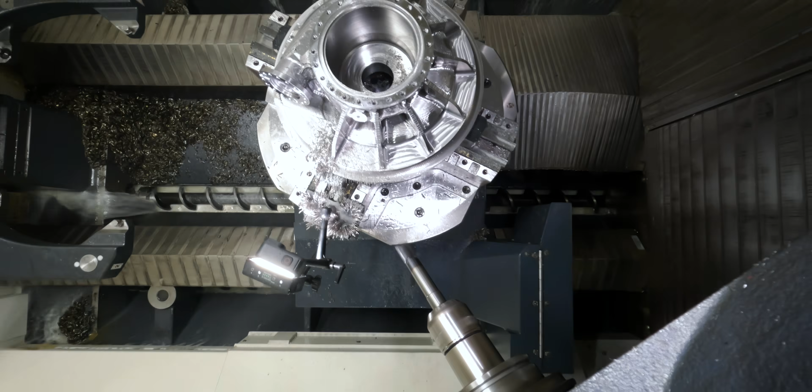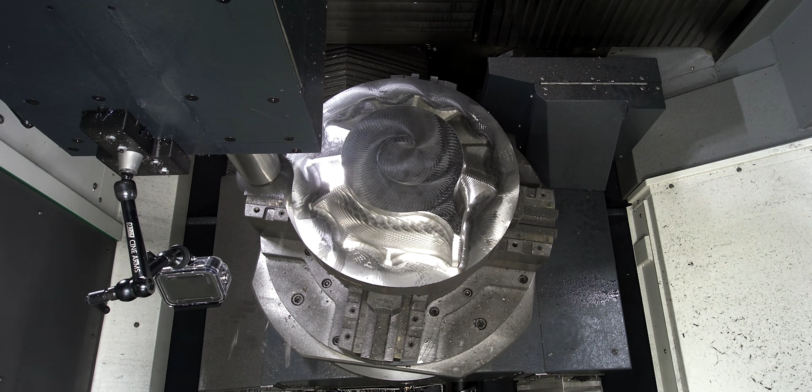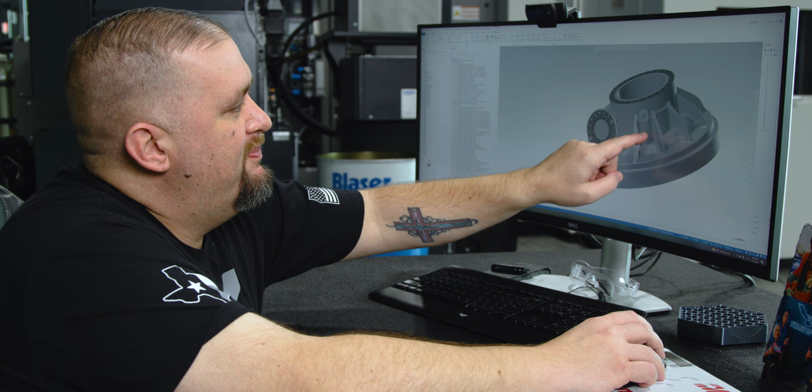Today we're back over here at the CP6000 working on our octo snail part. Now if you caught the first video, we did all of our roughing using 3-axis motion and then some polar interpolation. But today we're going to get into all of our 3+2 stuff. So this is the state that we left the part in at the end of our last video. And you'll see that we still have all these pockets underneath the port that we have. We still have to get underneath our flange. We have to get deep into these pockets here, and that's what we're gonna do today. So I'm gonna show you exactly how we did it.

Now before you guys start telling me how terrible this tool sounds, keep in mind that it's sticking out 8 times diameter, and then it's in a 7-inch long shrink fit holder. Add to that, we're going to be cutting with the center of the ball, and that's just the way this thing is going to sound. There's no way around it.

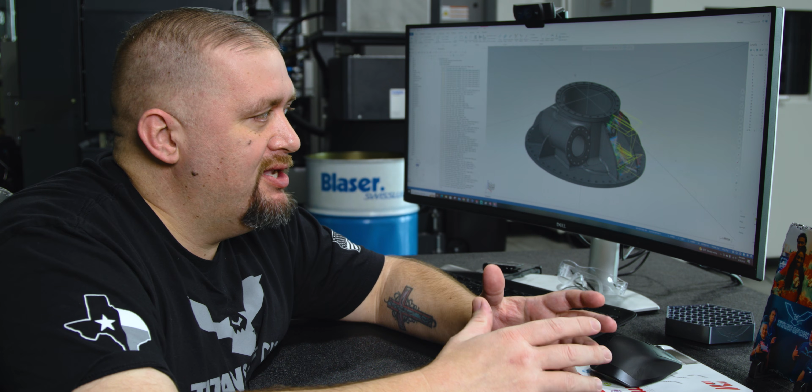Now in the first video, I talked a little bit about why you want to use primarily 3-axis motion on a 5-axis machine. Most 5-axis machines are going to be more rigid in the 3-axis orientations. And so today, as we start our 3+2, just to explain a little bit about what that means, it means we're going to be roughing still in 3-axis mode, but we're going to use our 2 rotary axes for positioning.

Now on Mastercam, 3+2 programming is super simple, but the first thing you're going to need is a plane that orients your spindle direction to your part. So I want to be split perfectly between these two ribs here, and I want my Z-axis to come in perpendicular to the back wall and parallel to the bottom floor.

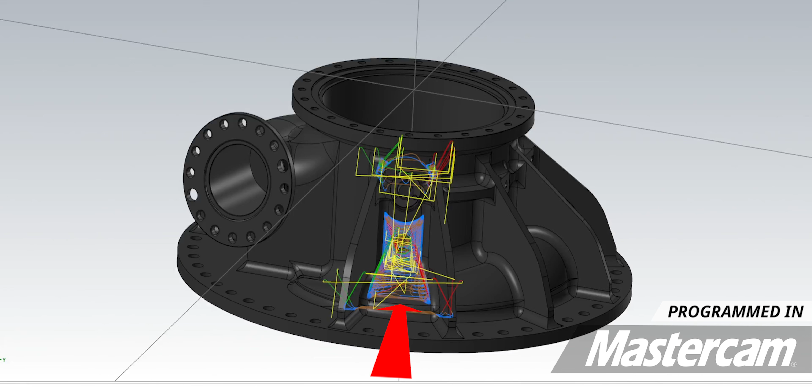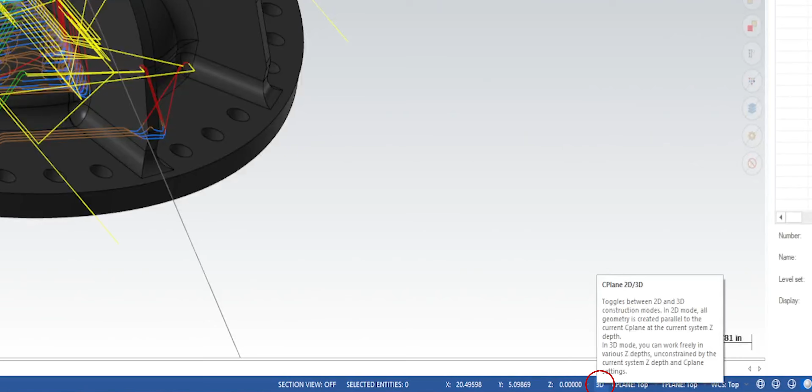So in order to get that location, I'm going to make sure that I'm in 3D sketch mode, and I'm going to draw a line from this point to this point. So now I have a line with a midpoint that I can use to find the center of that pocket. So we're going to switch over now to 2D sketch mode, look at our part from the top, and I'm going to simply draw a line from my origin to the center of that line I just sketched. So now I have a vector that I can use to create my new plane.

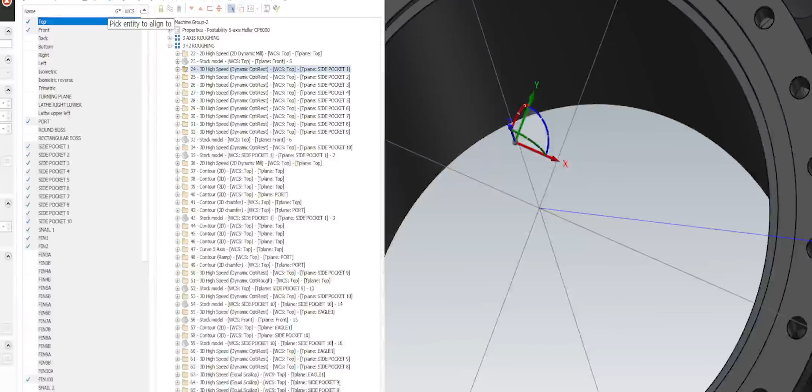To create my new plane, I just go into my planes, select a dynamic plane, snap to my origin, and then I can use these little bars here to align my Z-axis to that new line I just drew. Now I prefer to always have my X going in the direction that X is actually going on the machine, but that's not 100% required.

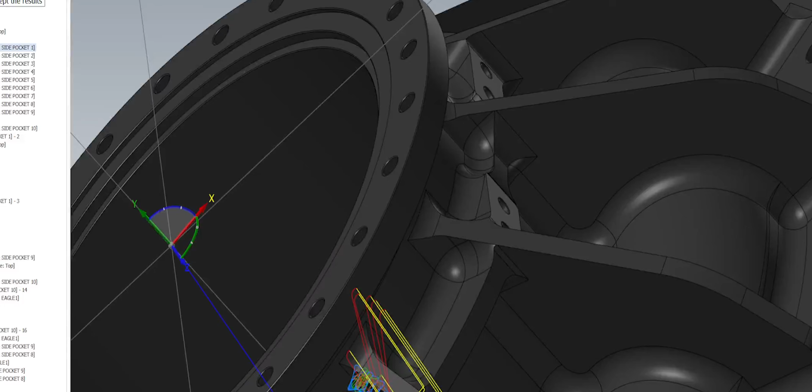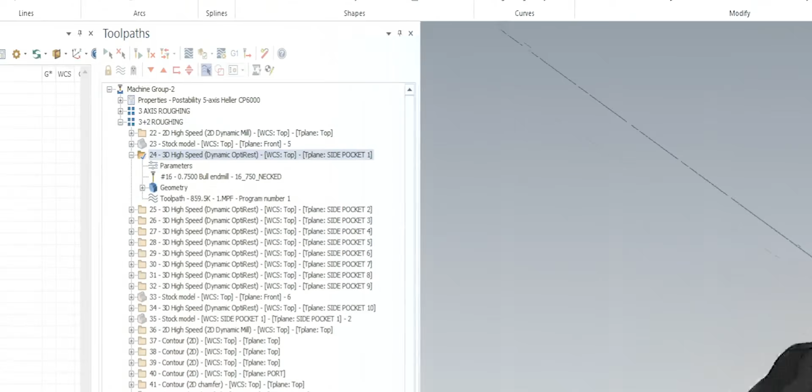So there you see we have our new plane, and now what we would do is create a tool path using our top plane as our WCS, and then for our tool plane we'll use this new plane we just created. So if we open up this tool path here where we're starting to rough out this pocket using OptiRough, you can see what we have in our plane designations here. Top, side pocket 1, side pocket 1. So now the machine knows that we actually have to use both our B axis and our C axis to arrive at a combination that's going to allow us to get into that pocket.

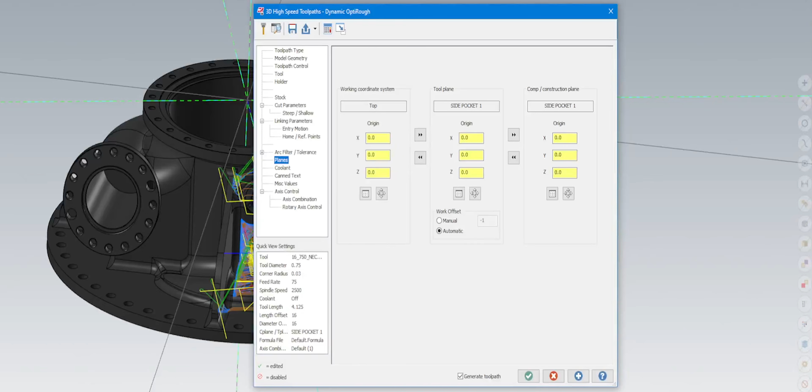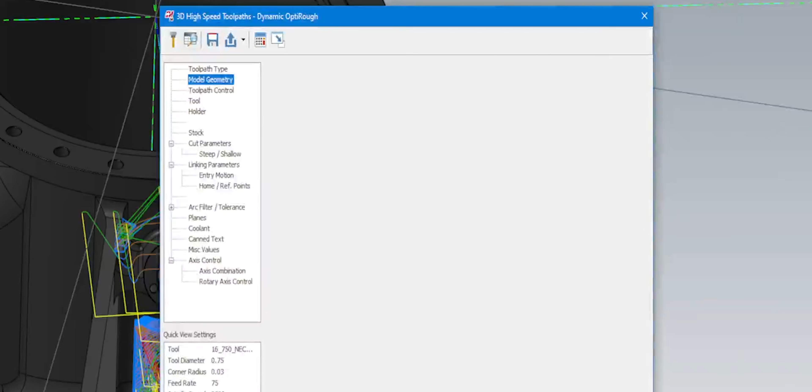Now we can look at the geometry that I use to control this tool path, and for our machining surfaces I just have the entire part and no avoidance surfaces. So how do I control where the tool path is going to actually go? I don't want it coming out here. I just want it to stay inside the one pocket that I'm focusing on. So we do that using our tool path control. Under tool path control we have a boundary chain, and for my boundary chain you can see I just sketched a nice closed loop that's going to tell my software that you have to stay inside here.

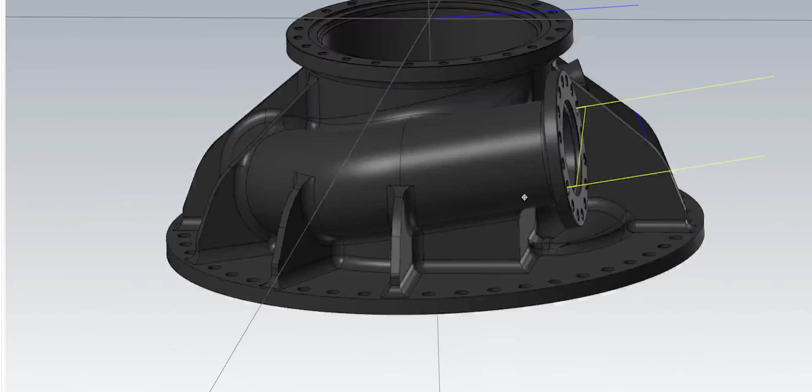So now that we have all of our pockets roughed out, there's some other things that we're going to have to get into here that are really going to be difficult to get to without colliding with our part. So if you take a look underneath our flange here, we have to get all the way down under there, and we have to make sure that we don't damage this front flange of our part. We're also going to have to get down in here, down underneath this flange, and we're still going to have to do some more roughing down in here, and we're going to have to be careful that we don't collide with our bottom floor here.

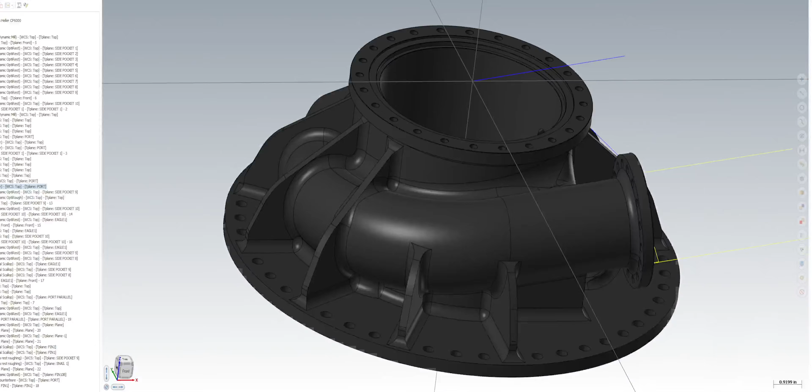So the very next thing I'm going to do is another OptiRest path, just like we did on the original pockets, and we're going to let it remove as much material as it possibly can before we have to start really changing our angles and struggling to get to some of these locations. And you'll notice the first thing that I did was come in perpendicular to this back wall. Now for this next tool path, we came in at this angle and got everything we could underneath.

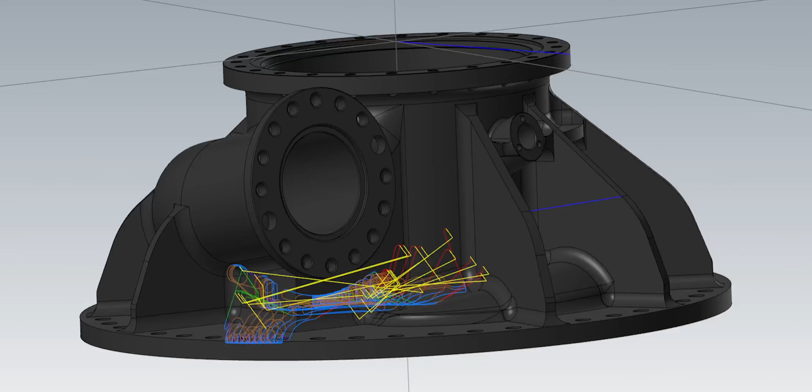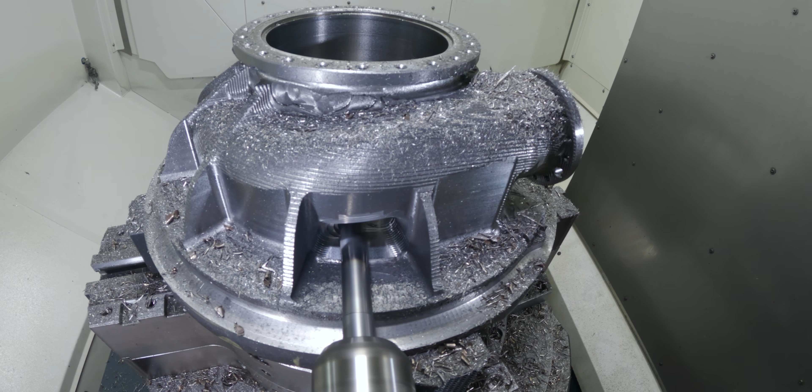All right, so now we have our part in this state here, and we've roughed out all this material using a bull end mill, so there's still quite a bit of material left in some spots here that I don't want to leave for the finishing. So you may see this 1/2 inch, 3 inch long ball end mill that we're using, and it's sticking out a mile. So it's not going to sound that great.

We're going to be cutting on the center of our ball, and you know, the holder's not very big in diameter. It's just not a very rigid tool overall, but we have to have it that way for the reach that we get. Because if you take a look at our part here, we don't just have to worry about colliding with our part. As our head tilts from vertical to horizontal, now we have to be concerned about our chuck hitting the front of our spindle face.

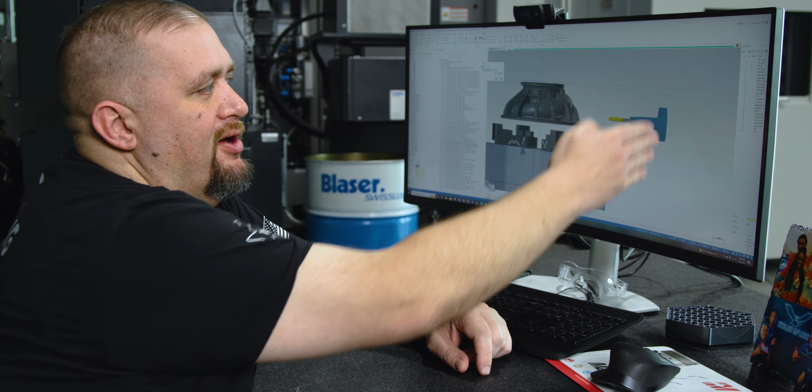So if you take a look here, I know that the back of my tool is where my spindle is. So I don't ever want to see this go past my chuck, because there can be trouble then, and we don't want another crash video. Oh. So you can see there, we're good, no collision, everything's gonna be fine. But we also have to make sure that we're not gouging our bottom floor right now.

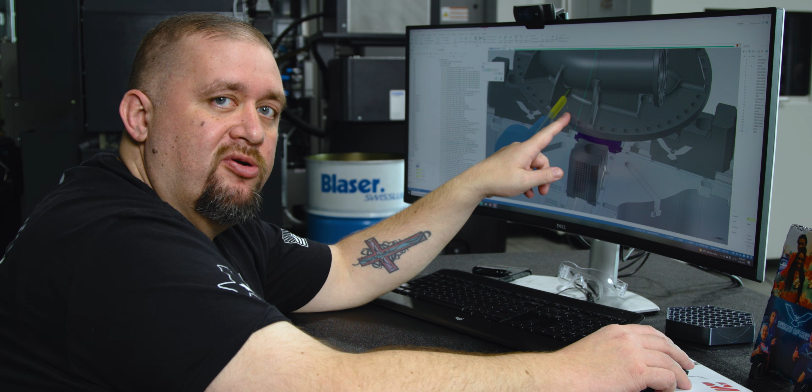So what I did in a previous operation is I came in and I actually took that floor to where there's only 2 thousandths of stock left on it. That gives me clearance for my tools to be able to plunge in there without rubbing on the floor and damaging my part. Now in this same group of tool paths, I did end up having to use one full 5-axis tool path, and that's to get up underneath our flange without colliding with our part.

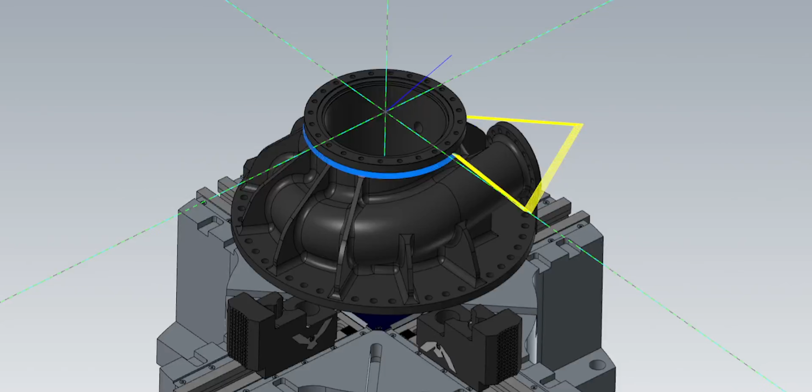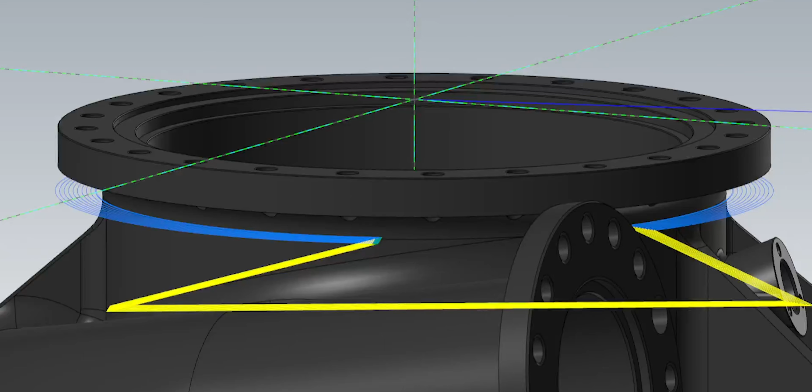So what I did is I used the curved 5-axis tool path, and all I have is a sketch underneath my flange that mimics what you see here tool path wise in the blue. It's just one semicircle, and we're driving our axis control using this outside cylindrical surface as my tool axis control face. And using that surface, I told it to maintain a 25-degree lead angle.

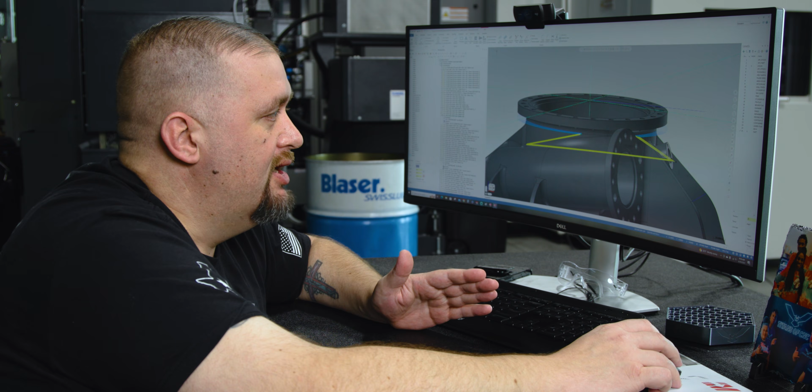Now the reason that I did this is very important. This ball end mill has 6 flutes. At 15 degrees, you're not engaging all your flutes in the cut. You have to be at least 22 degrees to have all of your tool engaged. So we went a little bit extra and we went 25 degrees. And if we backplot this tool path, you'll see exactly how it's working.

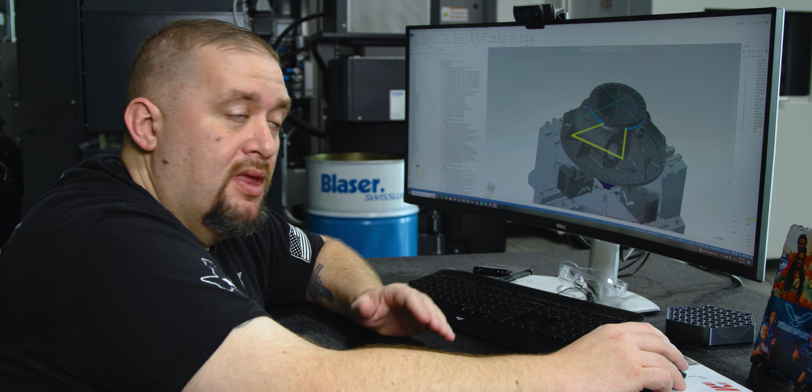Our tool plunges in, maintains a 25-degree angle to the surface it's cutting, and then it retracts to avoid our port. Now, that leaves me with this section right here in between. And how on earth am I going to get to that? Because I can't come at it from this way, and I can't come at it from an upward angle.

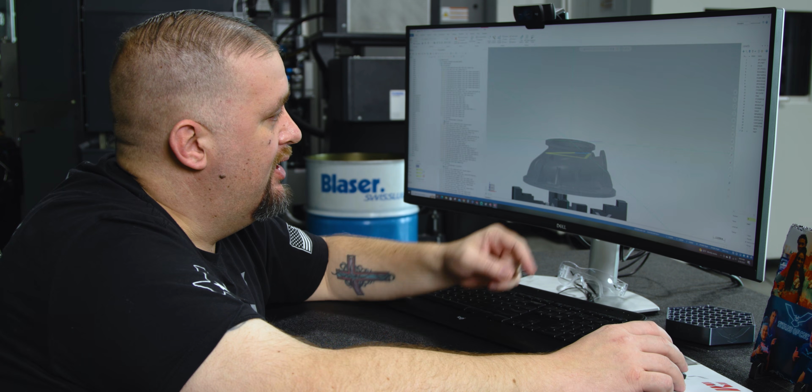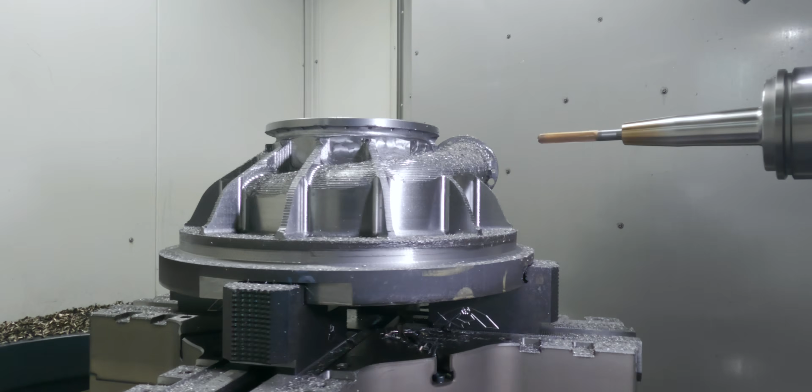So the only way that I can get to this radius under here is to use another 5-axis curved tool path, and this time we're going to just kind of stab at half of what's left over in there. Then we're going to come from the other side and do the exact same thing. And you can see that this part has a ton of clearance issues. I mean, as this is plunging in, look how close it's getting to the top of our snail there.

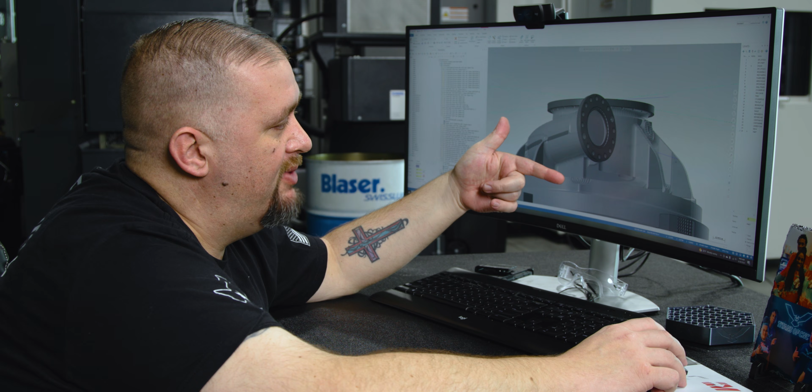All right, so with those two 5-axis curved tool paths, we took it to this state. Now, as I look at the part, I'm trying to see where there's still big chunks of stock left, because for all the operations after this video, I want to start finishing. So I can see here that I got a pretty good chunk left over underneath my flange. I got as far down as I could reach with my 3/4 end mill. I know I have a big chunk of material left in here, and I'd also like to get rid of some of the stuff that's in here, because some of that is about a 1/2 inch thick still.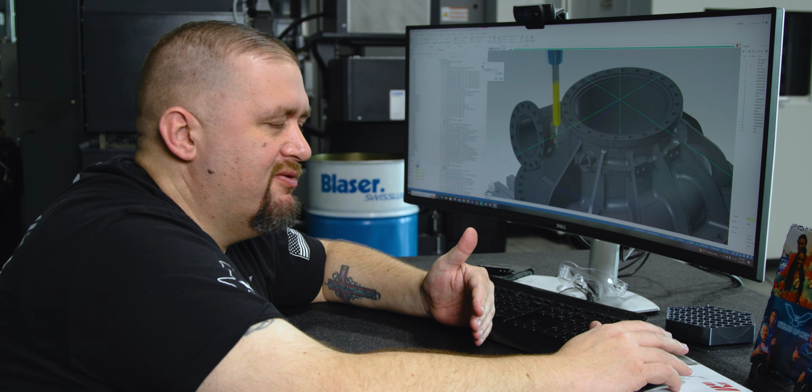So up next, we're going to come back in with our 1/2 inch ball. And this time we're going to get as far down in here as we can without colliding with any of our other pieces of the part. And one of the things that I really love about using Mastercam's OptiRough tool paths is that you're not wasting a ton of time cutting air. Using stock models and then using OptiRough, the software can see exactly where there's still stock left and only focus on those areas, rather than coming in and plunging and trying to cut all over creation where there's no material left anyway.

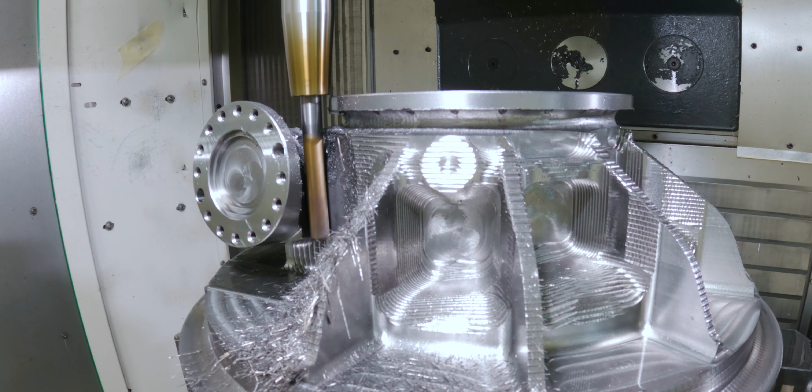All right, after this tool path, now we're going to get into some stuff that's pretty hairy, because the only way I can get rid of some of this material down under here is to come in at a very steep angle, and I'm going to have all kinds of obstacles here. I got to do this without hitting this rib, without hitting this port, and without hitting our top flange, but I need to be able to get all the way down under there, and that's almost impossible, but we managed.

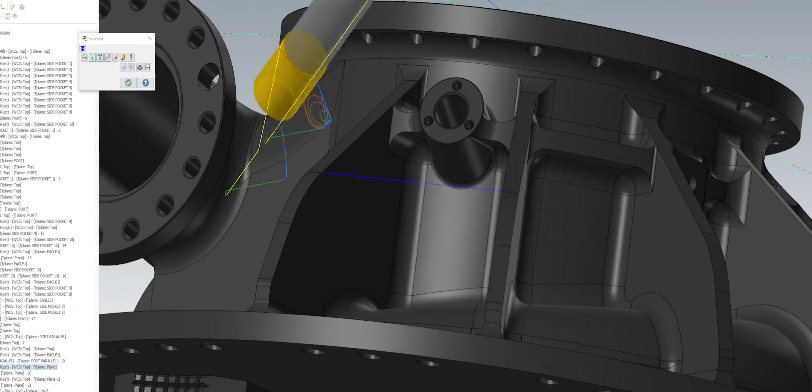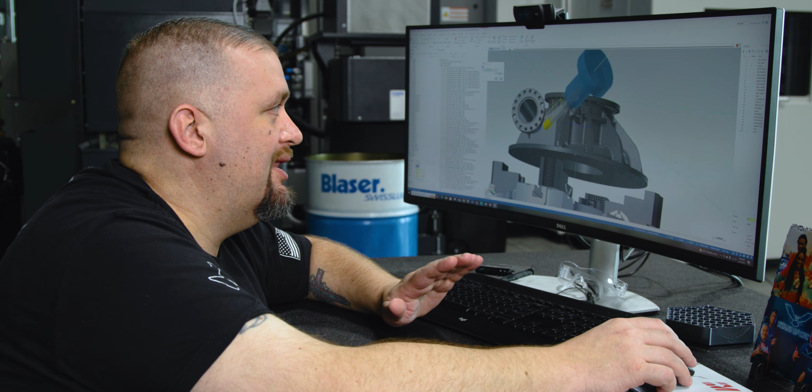We're coming in with our Harvey 1TE again. And you can see all these opportunities that we have to destroy our part right now. As we get deeper and deeper, our shank of the tool is getting very close to this rib, and as we get deeper, our holder starts to get close to that rib. Now the last thing that I want here is a scrap part, so I have to be very careful and make sure that I simulate every operation and verify every tool path to make sure that I'm not getting any gouges, whether from my tool or from my holder.

After that, we're going to change our angle a little bit, and we're going to come into that same area with the same tool and get some of the things that we couldn't reach from the other angle. Even though the angles are slightly different, you'll see that Mastercam can still see there's a whole lot of extra material in here against this back wall.

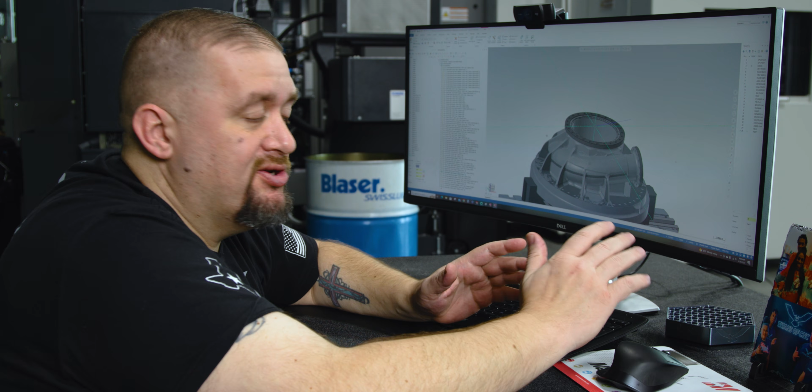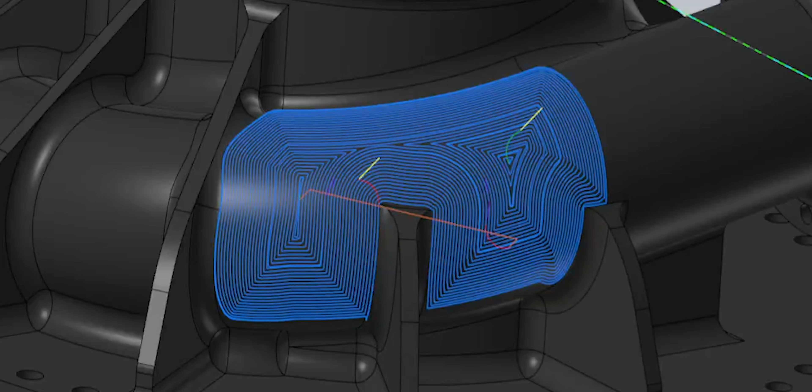All right, so next, I'd really like to get down in here and start clearing out some of this junk. But I'm concerned that if I do that, I'm going to be plunging into some of this excess stock that's left on top of our snail here. So as the tool comes in, it could be clipping what's on top here. So before I get into machining away all of this stock, I'm going to come in and just do a semi-finish pass to get rid of some of this stuff on the top of the snail. Now for this, I decided to use an equal scallop tool path.

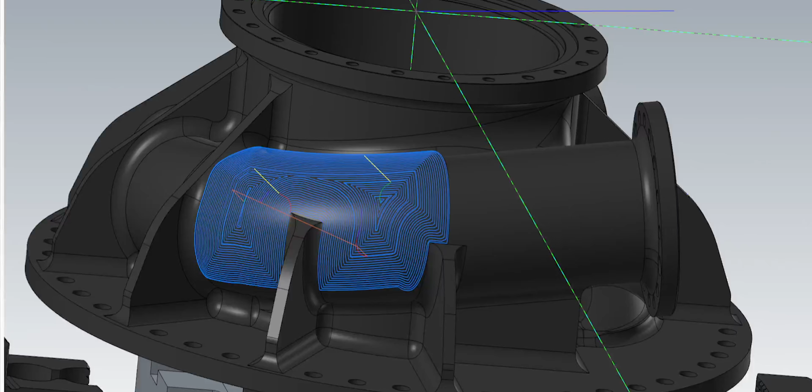Again, constraining it using a containment boundary that I sketched around this area here. And I'm gonna be using a tapered ball end mill this time because that tool is gonna be a lot more rigid than that 1/2-inch ball that we have sticking out a mile. So you see we start in the middle with a nice lead in, and then we work our way outward until we have that whole surface semi-finished. And then we come in and do the same thing a little bit over to the right.

Now once we have that material cleared out, I feel a lot safer about letting our next tool plunge into this pocket here. So you can see we took a couple passes there so that we can get rid of any of the stock that's left on the snail that our equal scallop toolpath didn't get. And now we're working our way into that area that's really difficult to reach, but it looks like Mastercam's doing a fine job.

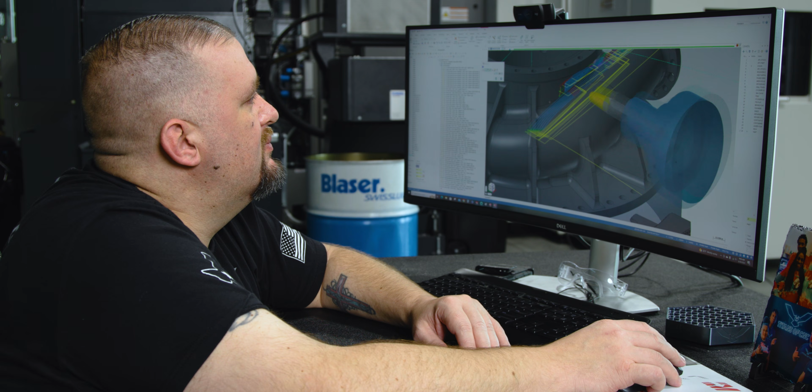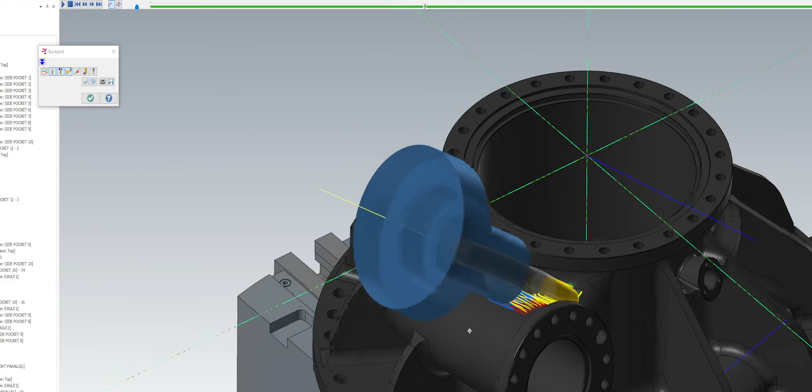Now you notice to get that stuff out of there, we came in again at a horizontal angle, but now I need to tilt it up a little bit to be able to get some of the stuff that's a little bit deeper. So we're gonna do the exact same thing using the exact same tool, but again, we're gonna have some collision avoidance issues here. So you can see as we're getting deeper and deeper, again, we're watching our holder to make sure that we're not gouging the face of our part because we're gonna get awful close to it.

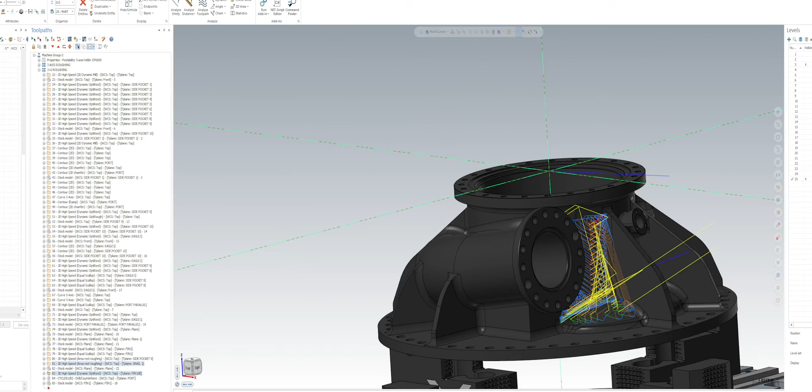Toolpaths like this is where steep shallow really comes in handy. By setting our steep shallow properly, we ensure that we stop short of when our holder is actually gonna hit our part. All right, now that we got that area cleared out, there's only one more spot where I really know there's a ton of excess material left, and that's inside here. So for our final toolpath, we're gonna come in with another opti rest.

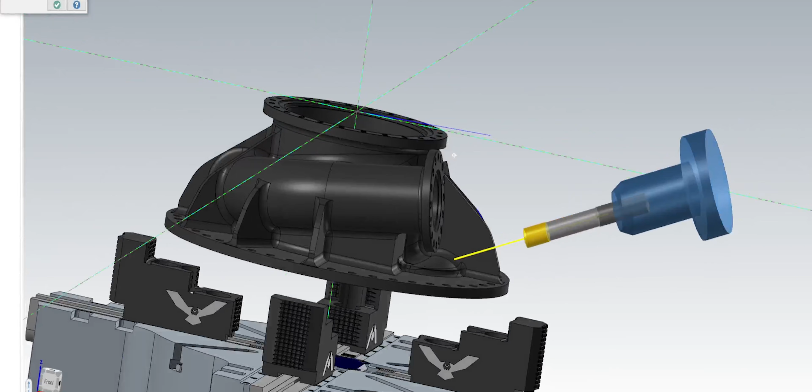So looking at this toolpath, you can see how my spindle orientation is looking at these yellow lines. So we're coming in at this angle, and then we're gonna rough out everything that we can reach in there. By coming in at this angle, I'm making sure that my spindle face isn't gonna be down here hitting my chuck. A lot of times you'll find that just by putting maybe a 10 or 15 degree tilt, you'll be able to avoid all different kinds of collision problems.

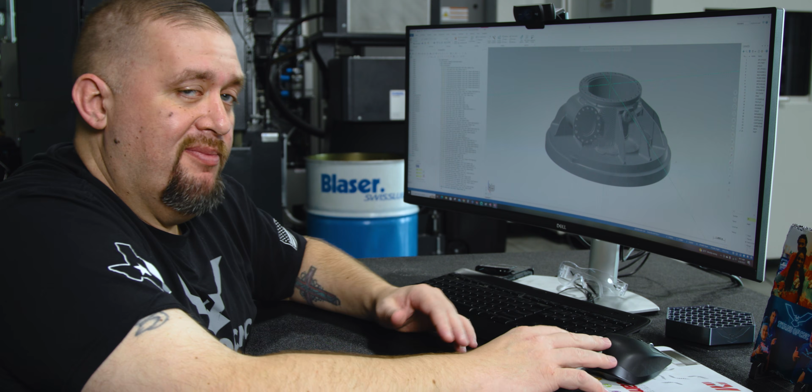And boom, just like that, we have our part in a fully roughed state, ready for us to start doing some semi-finishing and finishing. So everywhere that had a big chunk of material now is within 50 thou or so of the finished part. And I wanted to mention, throughout my career, I've heard a lot of people talk about how 5-axis work is some of the most complicated stuff on the planet. But you can see what we did here is all we had to do was rotate our planes around and then just create toolpath like we normally would on a simple 3-axis machine.

So don't be intimidated with 3+2 or full 5-axis work, because what it really does is open up a whole new world of machining freedom for you. Where a part like this would have taken maybe 60 operations on a 3-axis mill, we're able to do it here all in just one.